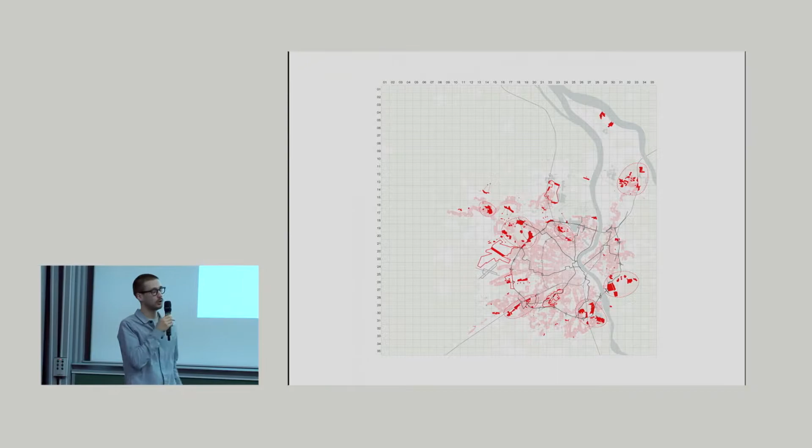Historically, 51N4E has been an office doing all kinds of projects, from very large-scale studies, such as this one in Bordeaux with 5,000 logements, to also very visionary projects we started out of our own initiative, thinking about how buildings could take up a function in reactivating cities. This is one in Brussels, where we developed a tower typology where a whole bunch of functions came together, but which was just out of the blue, without any brief.

We have also been doing large public buildings, really built architecture. This is an example in the city of Genk in Belgium, where we developed a cultural institution. And then very small-scale interventions, where we go up until the level of furniture, and develop furniture to see how it actually forces people to behave differently.

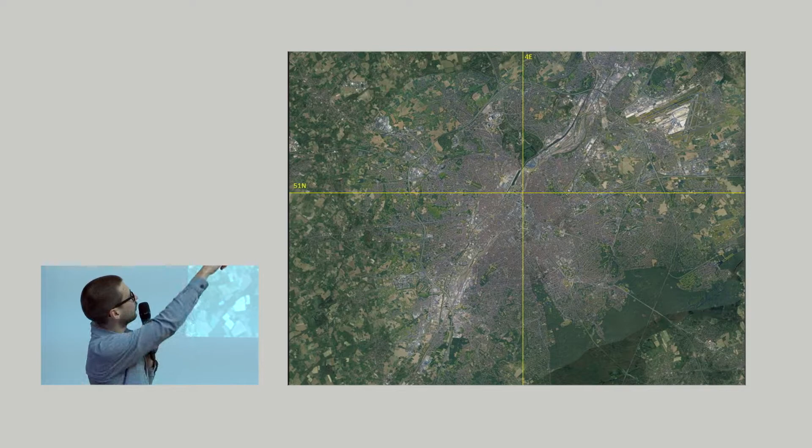So let's start with Brussels. This is Brussels - we are located in the north of Brussels. So you have the Pentagon, and then in the north there is a quite undefined area where a lot of things are happening today. You can see it here a bit. We are actually located in the train station, next to the railroad tracks. On the left of it you see the North District, which is a large office district built in the 60s, 70s, which I will talk about soon.

And then some industrial site - I will try to point it out. Yes, this industrial site, which is now also being reconverted. And we are actually located in this kind of area where a lot of things are taking new shapes and undergoing change at this point.

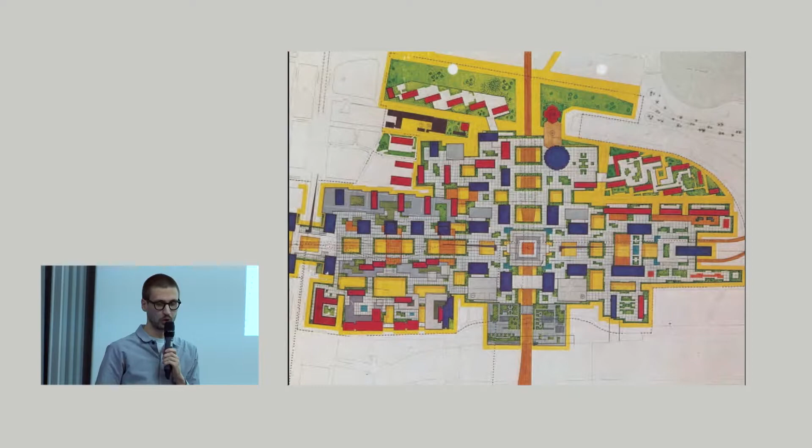So to explain this, I think we need to start in the 60s. This is a master plan that was developed for the district where we are in. So here in the bottom, you see the North Station. This is actually WTC 1 and WTC 2, the two towers about which we will talk.

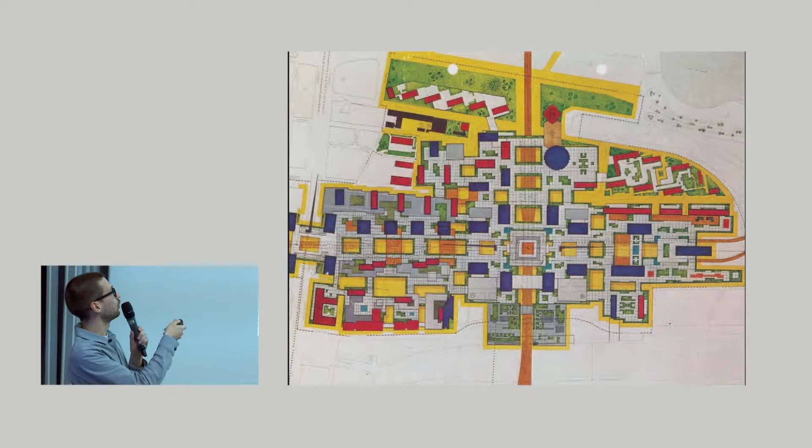And then you see a whole array of towers, most of which were never built, in blue office towers, in red residential towers, which were very clearly separated from each other, or there was a kind of strategy to build the office towers along the axes. So this axis which leads here into the city center, and this axis which leads up to the canal, which you just saw earlier.

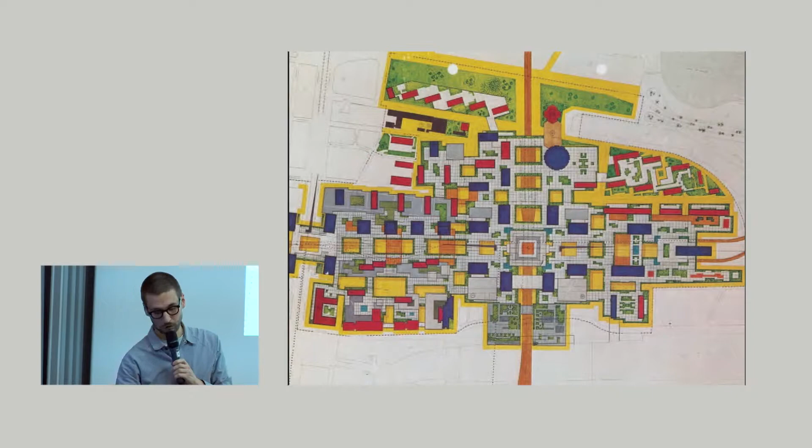The housing was actually placed in second line, and were actually replacements for previous, or existing fabric, which was working class houses, very small grained. So the idea was that these houses would be demolished, which also partially happened, to be replaced by these big infrastructures, big living blocks.

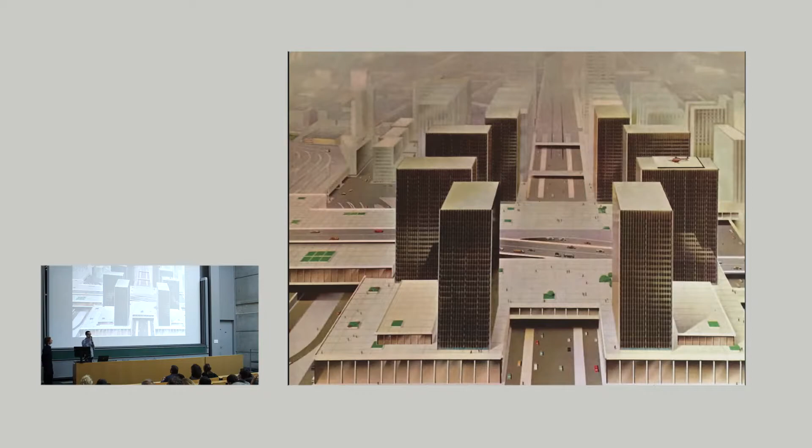And so these highways, which were, of course, infrastructure impossible to make at this point because we're in the middle of a city, are running exactly through the crossroads of the eight towers that were meant to be built around it.

This is a perspective of the two towers which we will be talking about. And here you see that the idea was to split the level on which the cars would go and the level on which the pedestrians would walk.

So there was a clear strategy to separate users from each other and not try to find a way to make them work together. This idea of trying to give space to everyone, but by separating them, is here made very clearly in architecture, and again is a kind of projection which takes a whole lot of effort to realize in an existing city, and which of course fell short quite soon when they started realizing it.

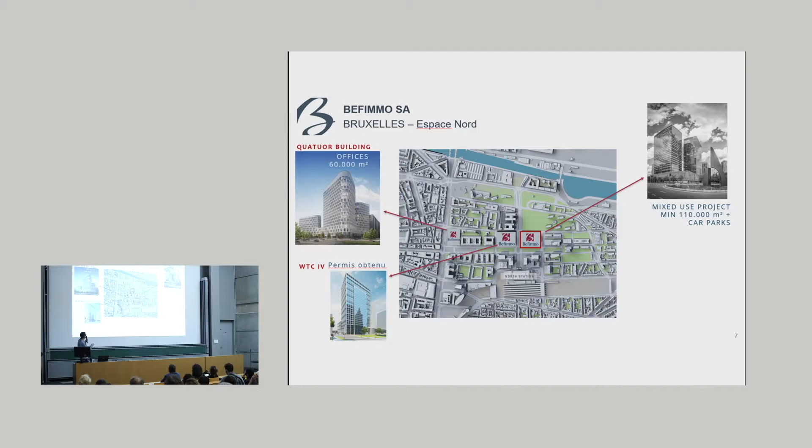So again, you see the North Station here, and so it was about these two towers, the two World Trade Center towers here, but he also owns the site on the other side of the street, and he also owns this building. So you start at that point understanding that the interest of this client lies beyond this project, and is also an interest in what do we want to do with this district.

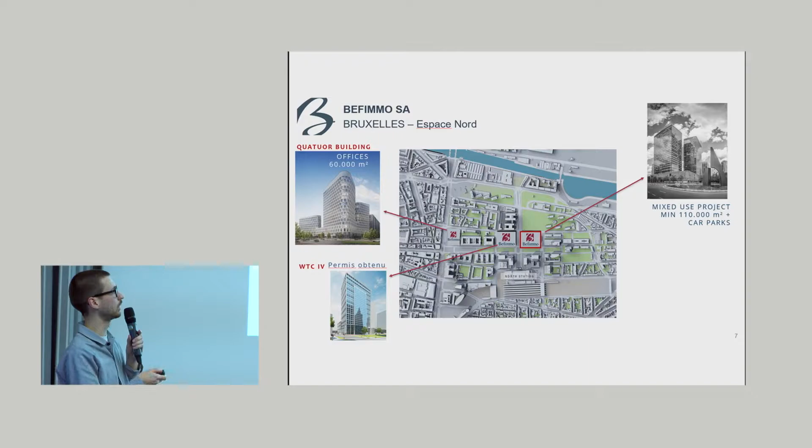And so that's the nice thing, of course, that as an architect you can also think beyond the plot and think how can we make something from this development, and how can it affect the space around it, and how could it actually lead to maybe different or other projects in the future.

What is maybe most surprising is that for such a huge building, because it's about 105,000 square meters above ground, with 5 floors underneath the towers of another 50,000 square meters, is that the brief was quite short. And so you see here the summary of it.

Which was basically what we got. And so you could say that this is quite confusing, but the quality of it is, of course, that you're very free to do with it what you want.

So you see that there was an ambition to turn the monofunctional tower of offices also into housing, into hotel, and also to bring in things that would actually start having a public use, such as retail or bars or restaurants. So this was a starting point, but also this, which was a project made by the architect that was already assigned by the investor to make the project happen.

And so the call was actually not for one architect to work together with the investor, but actually as a co-architect, a design architect, to come into the consortium together with the architect who was already on board and actually doing a lot of projects in this district historically seen.

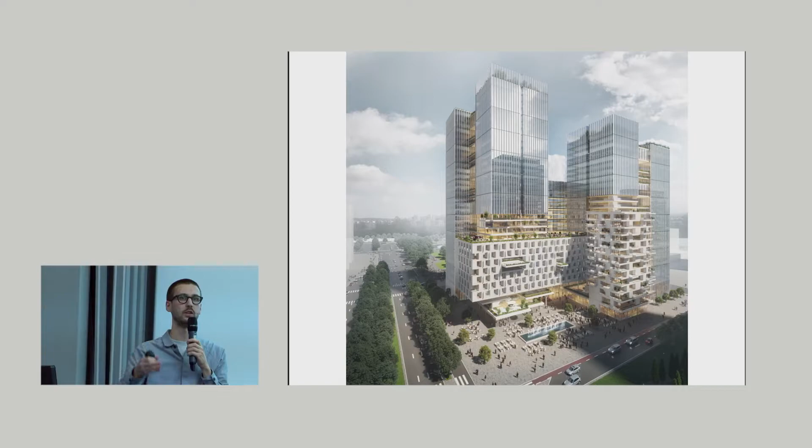So a lot of the buildings that you just saw in the images passing around, this architect, which is Jaspers-Eyers, has been doing for the past decades. And so this was an architect who was very well known with the area and had also a very established way of developing office buildings, but also, as you see here, office buildings mixed with housing, with hotel.

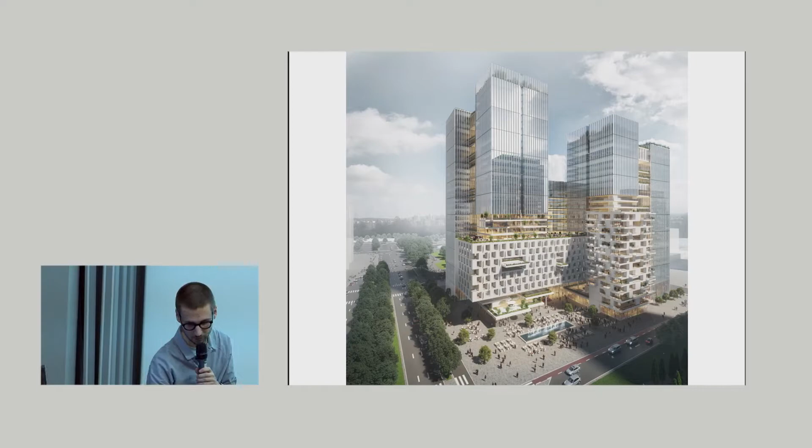And so this was the projet directeur to which we were asked to answer to. This was the architecture. And next to that there was a study by the engineering firm Greisch, which is in Belgium, a structural engineer, of how we could actually reuse the towers.

And so there was a whole study made of, could it be that we conserve everything? Should we just replace the floor slabs around the cores that are inside the two towers? Or should we just demolish and reconstruct? And there the question was, do you do it with or without the internal circulation cores.

So a whole study was actually already done before we came on board, and which showed that actually keeping the towers with their floor slabs around it was not possible. There were issues with the carrying of the plates, but also issues with the free height that was possible, and which you have to somehow comply with for a standard office market.

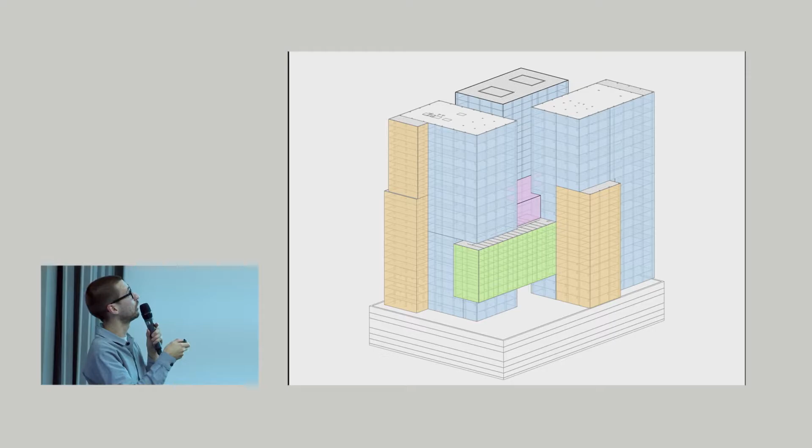And so what they did here was how to bring in more quality was to, instead of keeping all the floors, they reconstructed a floor where there would be one today, and then skipping 1.5 level to go to this floor, which is a new floor and which doesn't attach to a floor slab today, and then again a floor slab which was already there today.

So they were actually multiplying the floor height, which was in the towers today, 3 meters 22, but actually very limited, to 1.5 times this to bring in quality, to actually compensate for the loss in surfaces that you get with this. They propose a third tower behind the two existing ones, but which of course had problems in terms of daylight and quality.

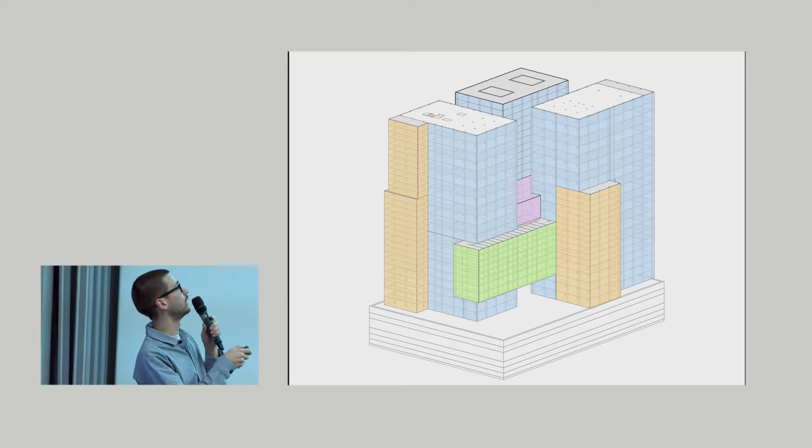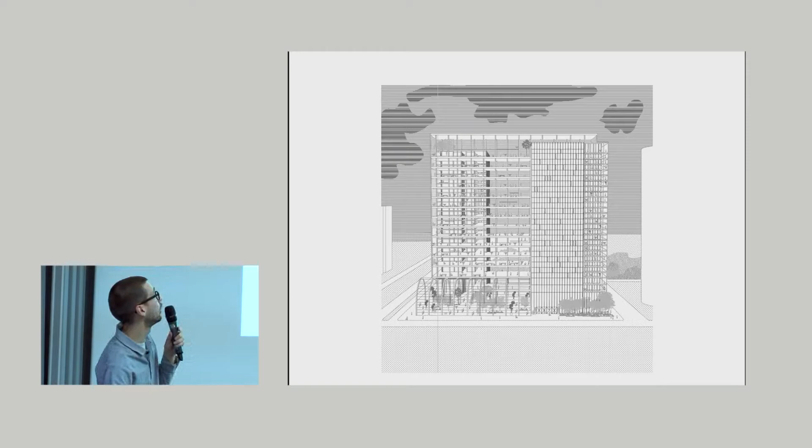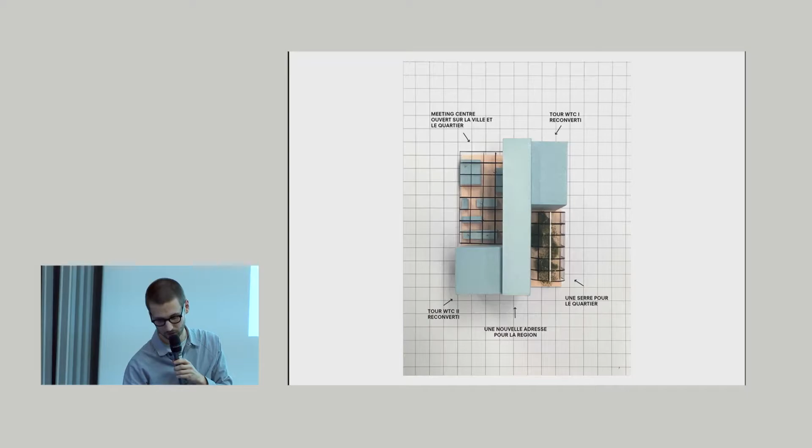This is the first image of this concept, where you see the two towers being linked with a new volume. What we also did was program the two corners, which today are closed plinths, addressing them to the neighborhood. On one side you have the greenhouse, or serre, which addresses the North Station and the business district. On the other side there would be a meeting center, addressed more to the living neighborhood and the canal.

And this was a second important thing—completely opening up this closed plinth, because it never got a real use. The idea of having pedestrians and cars split in levels never came about, so this closed plinth was always a hindrance to making interactions with the city.

Here we clearly turned that around and made direct connections to the street with the greenhouse, the shops, the entrance of the housing, the meeting center, the hotel lobby—so the streets are actually activated, where today they are very desolate.

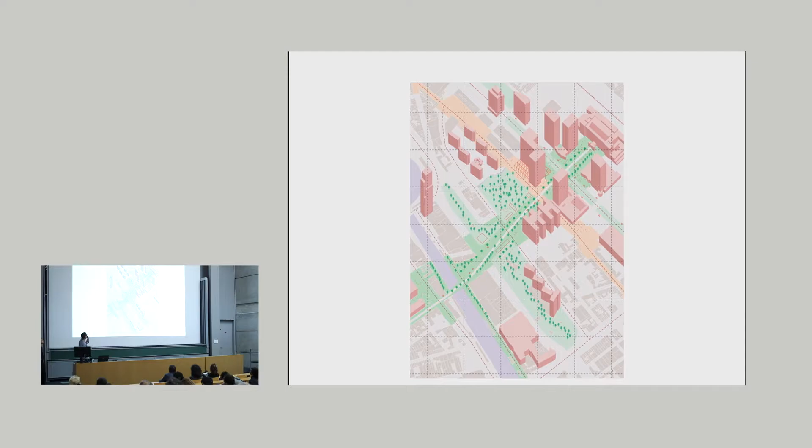Here you see the integration of this strategy into a drawing showing the development of the neighborhood, where there's a shift happening from this axis, which is around all the office buildings built according to the master plan, to a new axis being created today between the North Station and the industrial zone, which is also being reconverted into a cultural place, with housing and offices happening here too. This new axis links a lot more realities in this district than the old one, which was very focused on the office environment.

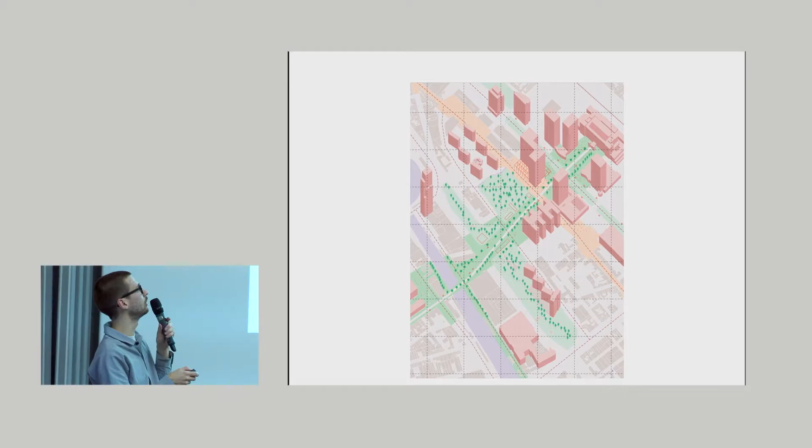This axis will gain in importance also with the Kanal Centre Pompidou, developed right next to the canal. It's this axis which we activated with the greenhouse and the main entrance of the new offices, the shops—this would be the new main facade for the biggest program, the offices in the building. Next to more locally oriented functions like the meeting center, but also sports, a co-working place, a supermarket, which reinforced this local street, a street that dated back before the demolition of the neighborhood took place.

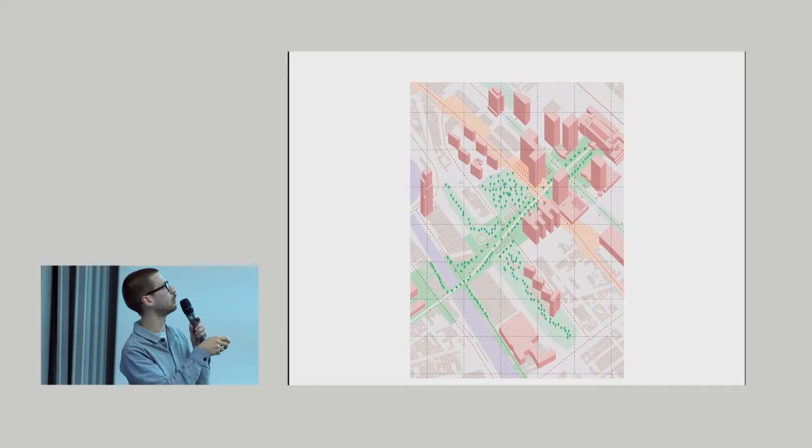Today there was a big gap between this housing area and that one, because of the two towers in between with a closed plinth. So we kind of restored that fabric by putting this building, and also the entrance of the housing, on that spot. A last thing we proposed as a first idea for the investor to react to was a planning, and a very intense one, because the investor had a plan to propose the building to a future user for the offices, which was a very important goal for him to reactivate his building.

Giving structure to this process meant different process lines interacting with different people. There were conceptual talks, programmatic talks, technical talks, talks with the city, and talks with stakeholders of the neighborhood, all running parallel to each other, which was immensely important to be able, in a short amount of time, to develop together a concept that would implement this complexity.

With this proposal, we won the tender. We got to know that they said, we don't want this projet directeur from the other architects you just saw earlier, we want your project. We think it's the best way to reconvert these two towers. And that's the moment when it started.

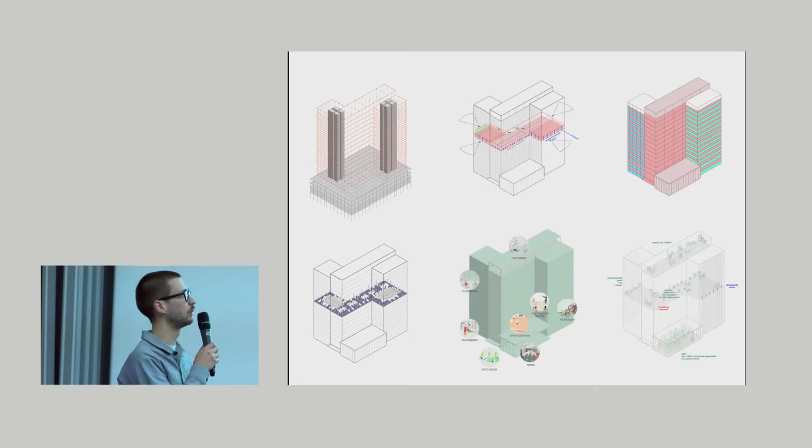So you see that actually the environment we were in was actually part of the process of doing this project, and getting the understanding of what the multiplicity of interests was in developing this thing. And so after winning the competition and being confronted with this huge building for us, which is not something we do day to day, and we are not at all prepared for the scale of building.

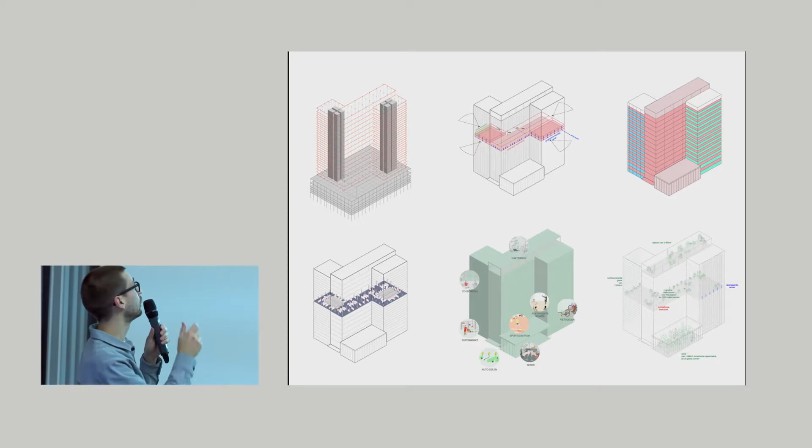At that point we started designing it, to actually design it in a way that it is answering to the different aspects of what this building could become, and how it needs to be prepared to become something that is open and not programmed for one use, but able to shift its identity or function during its life. We looked at it in a holistic way, which you could also call a circular way nowadays, which talks about a lot of different dimensions. I'll go a bit quicker now to talk you through these dimensions.

After winning, we also decided to investigate if we could keep the existing floor slabs, knowing that it would be quite dramatic to tear them down. You could say we're keeping the cores and the underground of the existing towers, but in spatial volume this is only a part, although in weight it accounts for a lot.

We started making technical drawings, comparing the new volume which we built in between, which has a double height, with the existing towers which have a regular height, and seeing how they would work, how we could solve it technically, and how these things would meet each other.

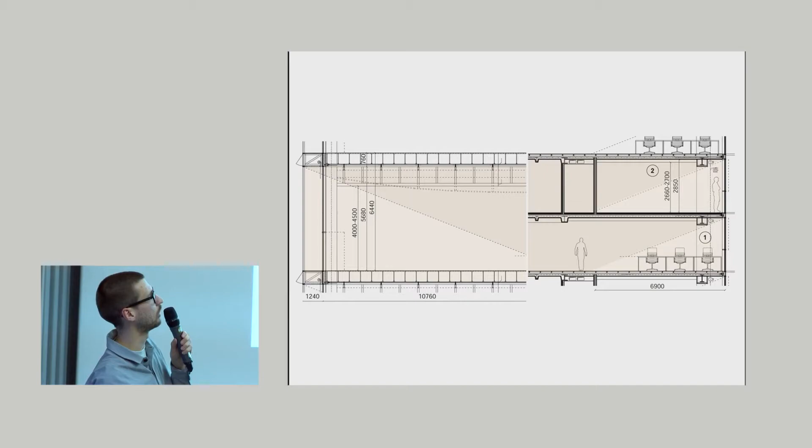We started imagining opening up windows in a tower which up until then had only closed windows, and you couldn't bring in fresh air. This is one of the main qualities we thought would need to be there in order to have both housing, offices and other uses.

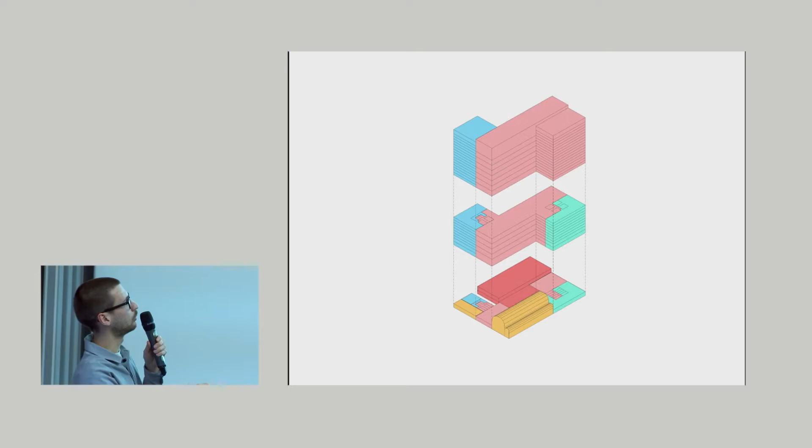We started netting the program into the building, and you see here a scheme where you see the different programs. In blue, the housing. In orange and pink, the offices. And in green, the hotel. They're actually next to each other.

While researching, we discovered that it would actually be more interesting to think of this connecting device that we installed in between the towers as a platform which continues into the existing floors around the cores, therefore making very big surfaces which are enormously flexible and reduce the building in height per function, because in the in-between floors you could program the housing.

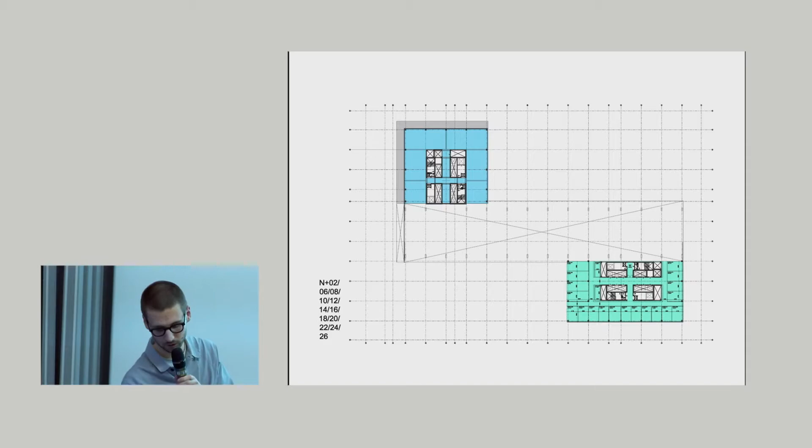Here you see a very sketchy way of drawing the apartments, and hotel rooms in the other one. It would actually deliver this building, if you look at it from a surface table, where you have very large floors on every uneven level, where the double height volume that we put in the middle connects to the towers, with housing and hotel on the even floors in between.

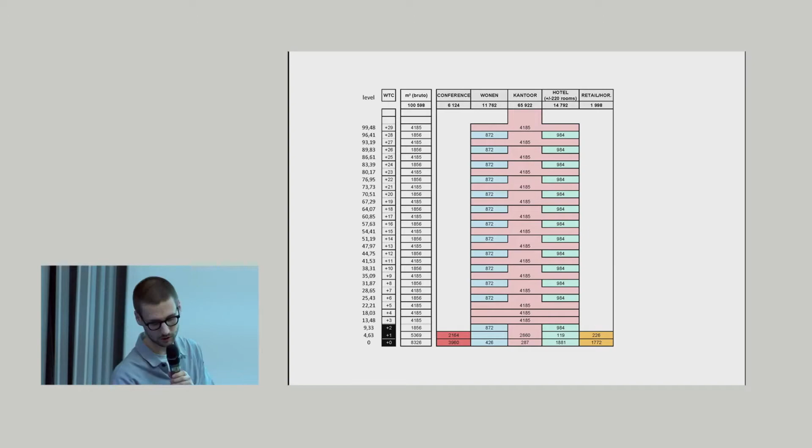And it would deliver this scheme, which is quite unusual, and which we also discovered along the way - it was not a design intention or anything. It was just responding to the qualities that we discovered as architects ourselves while investigating the program, but also the way this building worked with this new volume in between.

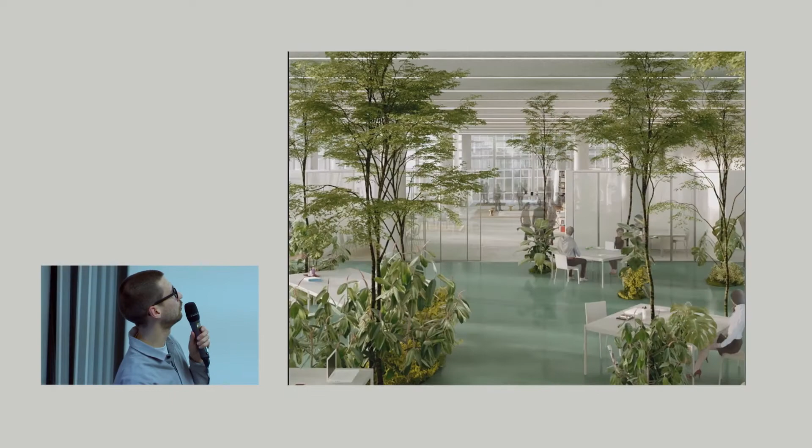And so we started understanding the space, started imagining it. This is kind of an interactive working environment that you see taking place in this new volume. But there could also be kind of a forest because of the height of the floors, which is 5 meters 30 free height that you have here, which is huge. All kinds of things could actually take place - this is a library.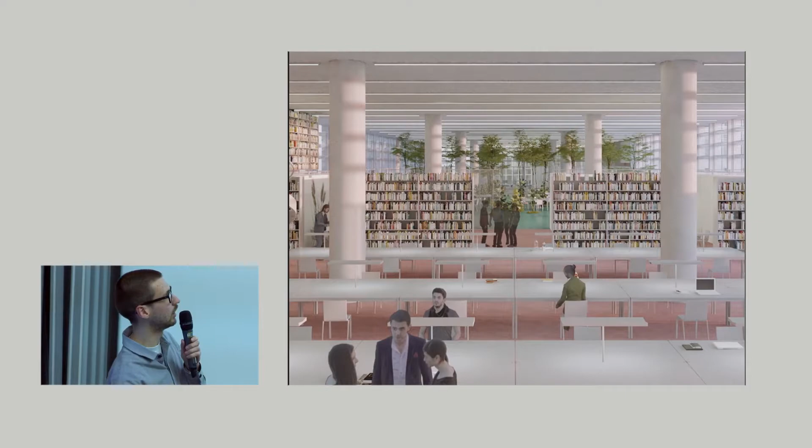And so this freedom in arrangement of this building was also the freedom that was necessary to actually convince the future user, the future office user of this building, to come to this building.

Yes, here we are. And so drawing office plans for this tower was actually very interesting, because you don't have the boundaries of a typical building where you have just one layer of space to actually make closed or open spaces where you can work. But in this double height volume, you have much more flexibility into how to arrange this plan.

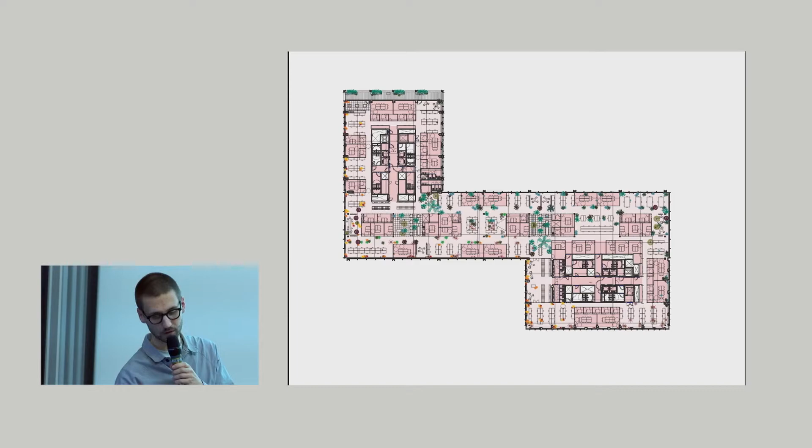So here you see the plan, which is much more free and allows a lot of possibilities. So this changeability is there, both in the office plan as well as throughout the building in its program. So also the programs could change relative to each other.

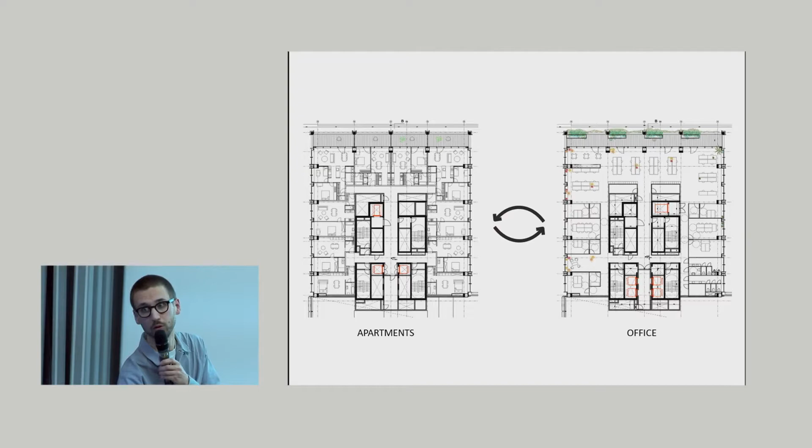This investigation was also very much a technical one, on how this building could actually be converted in time, where today you install a housing program and tomorrow there could be an office program. The changes that come with it are actually all linked to circulation, how you enter the building, and are not so much structural. So this kind of installation of principles which allow for this change are very important to make a building that is future-proof.

But this is actually not noticeable on first sight, because the strategy chosen to develop the architecture with is one that is non-program related. So the towers that are left over, because we cut them short by introducing the new volume, are developed in one language, not linked to the program behind, because this can change over time. And then the new volume in between is clearly of a different type, with a different facade and a different expression.

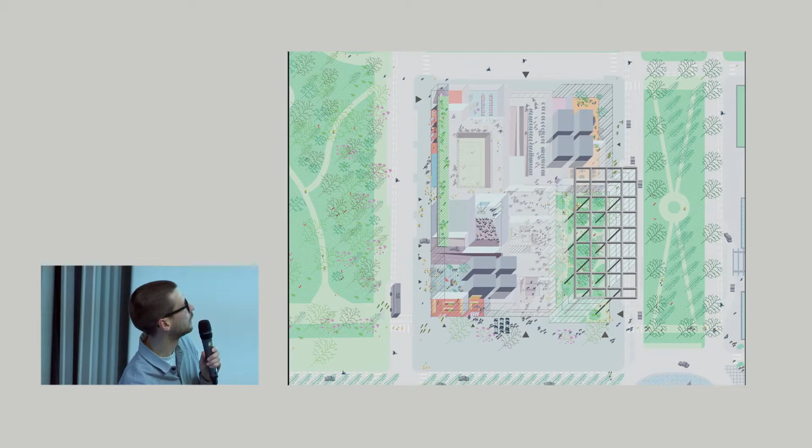So this is then a plan of the ground floor. These spaces that we developed on the ground floor were developed to also be able to interact with activities happening on the public space.

The greenery strategy, which we developed also as a test case in our office, installed into the building, and also on the roof terrace.

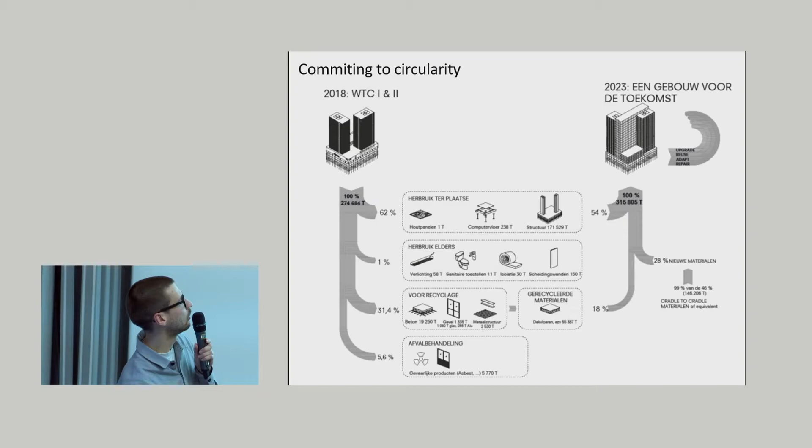I will quickly go through this one, which is talking about the way the old building is, on a material basis, reused in the new project or elsewhere. While the building was already empty, so we had to leave it at a certain point in time, all the materials were excavated and brought down, and from there actually distributed either to recycling plants or to the producers of the material itself.

So even though these materials were made 50 years ago, some of the producers took them back and recycled them, and some also went to other projects in Brussels where they made new walls out of these materials. Floor tiles on the roof, which we will reuse in the project itself, are stocked today on the site near the canal, and part of them are already cleaned and look like new.

We also tried to reuse things like these covers of the radiators. We made tests of it, we made drawings of it, we made a mock-up, and we actually showed that this reuse is possible. But in the end, not feasible economically, and also not feasible in terms of risk, because these elements are also 50 years old, so they have slight dilatations and are not so straight. To apply them in a technical way in a new building was not feasible, so the solution in the end was to use them in different applications.

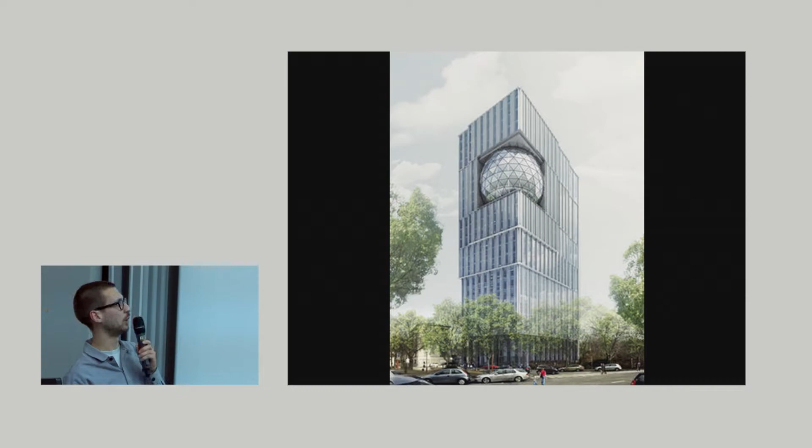I will quickly jump to the next project to still leave time for Wim to talk about the other two projects. This is another tower we are doing in Brussels, the older IBM tower, and it's actually a very famous building because the ring road in Brussels passes next to it. Due to its architecture, which is quite remarkable and linked to the identity of IBM in the 70s, it's really a landmark, and so there were plans on the table to reconvert it into something like this.

Who asked us to think about how to tackle this building and what he should do with it. So we went on site, and we discovered that the building as it was had a lot of qualities. You have these windows which frame the city very beautifully. Each window is almost a panorama.

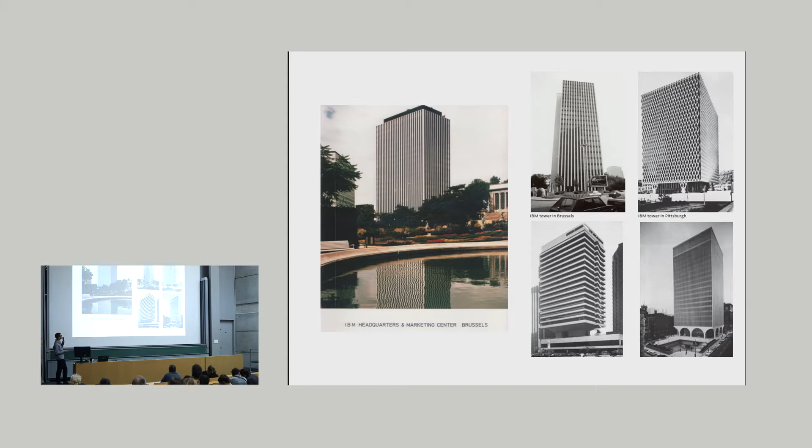So we decided that this architecture is actually so valuable and is for us kind of heritage, both to the city of Brussels and, in a larger story, as modernist heritage, as you see here with the other buildings IBM made throughout the world. We decided to keep it, and so this is the new project we proposed, where we did just a few adaptations.

On the ground floor, we opened up the building. We made a piano nobile, which actually relates the building to the new square in front. And we topped it up by creating a roof terrace. For the rest, we didn't do anything on the design of this facade.

Also interior-wise, the building was very generous. It was all open floors. The only adaptation we needed to do was adapt the facade to create more height here and more generosity in floor height, because there was an old technical gutter for the heating and the ventilation installed there.

This is then the new design with the potential new functions behind it, organized like this. So the new building, instead of being a monofunctional office tower, would become a co-working space, then some offices, and then a hotel above it.

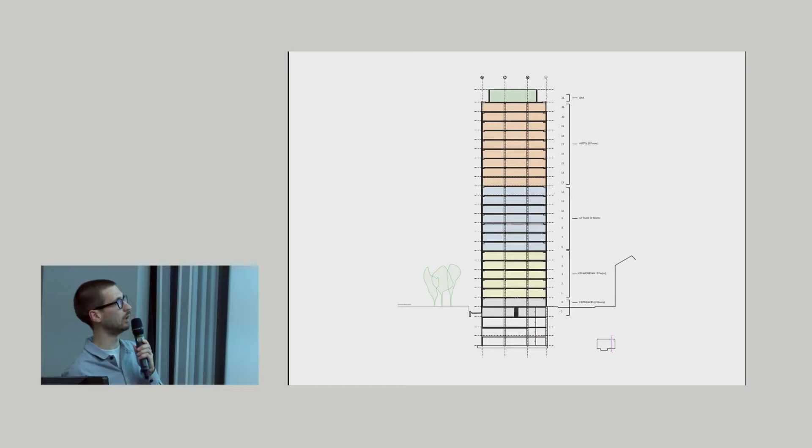And so the building again is being adapted and given diversity. Also on the ground floor, this diversity is addressed to the street, so that this square, which before was not a square but actually an empty dead zone, would be activated and would become part of the city again.

So we worked with the design that the landscape designer already had made for this part of the street, going from a tunnel leading to the North Station and going to the city center. We reacted to it by mimicking the design in the entrance hall, raising together with these steps, also in the interior, with steps towards the level of the elevator lobby. And so bringing in the square.

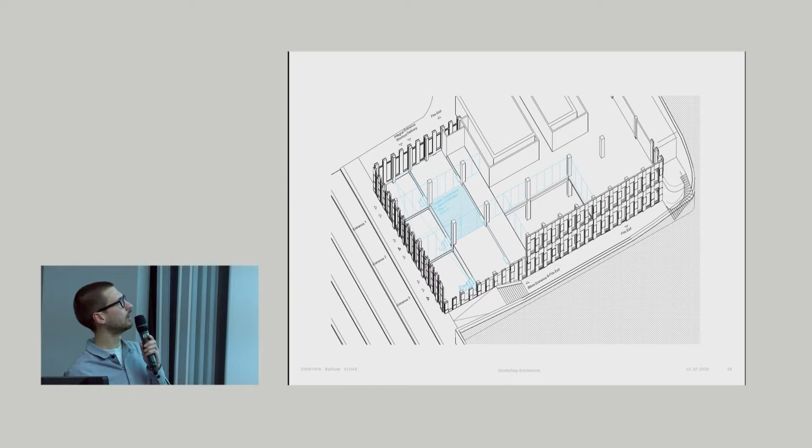And also actually facilitating the different entrances for the three new users that could come into this building. We also designed the relation to the park, and this is actually the result that is being built at the moment. So just a few pictures.

Hello, everyone. I think we move a little bit more to the north. We go to Antwerp, and then we go back to Paris. We come nearer with the next two projects.

First in Antwerp, we did a very small project in the city center, near the former harbor, which is now becoming a residential and cultural area. We acquired a new small project a few years ago.

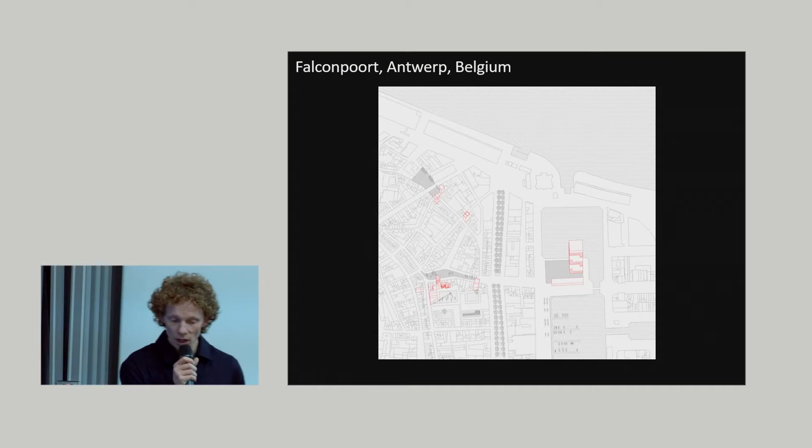This came from an architectural competition where our new client, AG Vespa, an independent communal developer, has the vision and ambition to develop and transform the city in punctual ways. So they transform corner buildings into dwellings, and in that sense try to impact the development of the city.

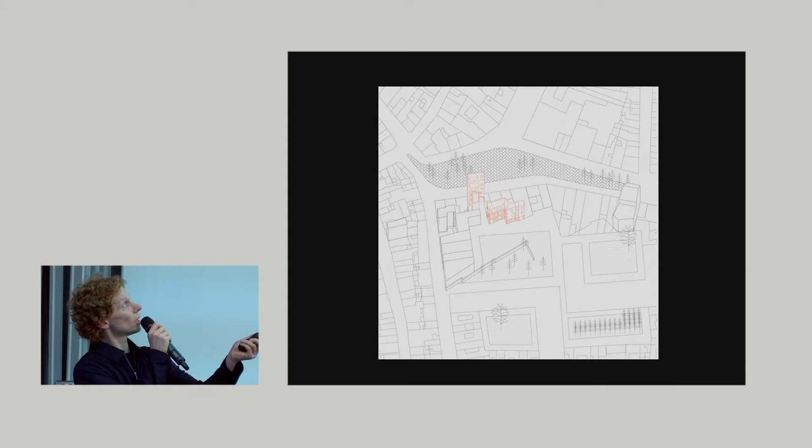Our project is actually spun in between a larger public space on top and an inner courtyard which is surrounded by residential blocks. The project has two areas, let's say, or two building blocks: the gate building and the courtyard building.

The historical context is quite stirring in a sense that the plot and the project was part of a monastery, and the gate, a Baroque gate dating from the 17th century, had to be integrated since it's a protected element in the project.

But you also see that through time, this monastery was adapted and transformed, and that the proportion, the size, and the position of the windows was not like before, and this needed to be restored to the original composition.

On the inside, on the courtyard, you see older houses which were really in a bad state, houses where the nuns were before. This is the small alley coming from the public square into the courtyard, which is pretty closed off. It's quite problematic, also knowing the context of the red light district in the nearby neighborhood, and also the problems created by closed off walls, garages that are closed, and blind walls.

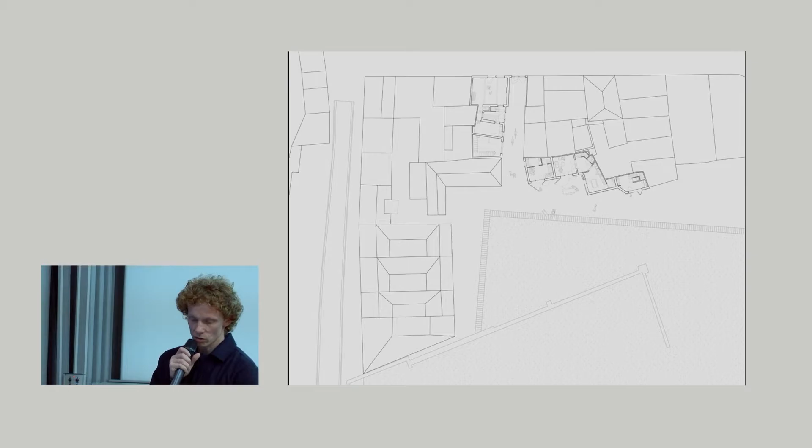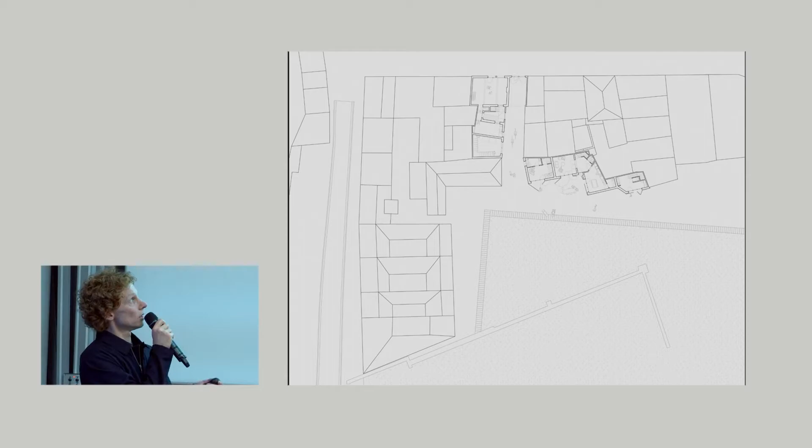And so we introduced the proposal with 6 dwellings and a shop on the ground floor, where here specifically there was a tension between public and private space. The city of Antwerp wanted to preserve the connection between the public area, the public space, and the nearing streets with this passage, so it allocated it as public space, just right up until the plot border.

You have a really strict line between private and public. And the question here rises: how can we make, on these small areas, 6 dwellings and still have a house which is part of the city, a house which is private, and a house which people can also enjoy, and how they can appropriate the public space.

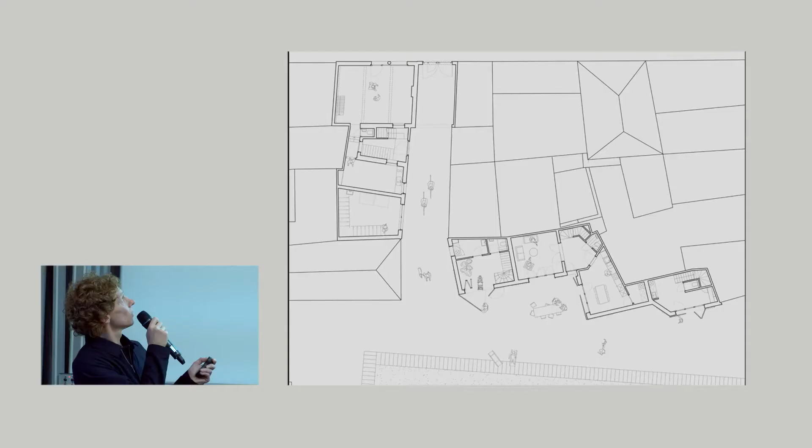Six units and a shop is the program. The shop was integrated in the gatehouse, and all the elements that were not original were demolished. We introduced an open staircase here between the existing original gatehouse and a new volume we created, where the open staircase became a shared space in which people could relate to one another.

And the other three units were organized in a 3-story high volume, which was laid out at the back of the courtyard.

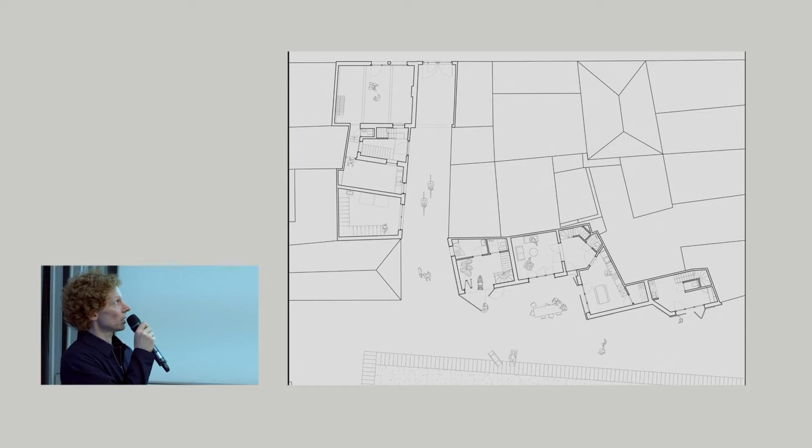This open staircase somehow also activates the public domain and allows for better relations from the private units to the public space. You come outside of your apartment and you are immediately invited by the perspective towards the courtyard.

I'm taking you up into the open staircase. It's quite a difference of scale, I think, but it shows how we work, which I will also explain a little bit later. Here it's about size, about how to relate and not to relate, how to allow a view and not, how to create open relations, and also how to mitigate and control privacy.

We start from the bottom, where you actually see the height of the wall is just enough not to have a full open perspective on what's happening behind.

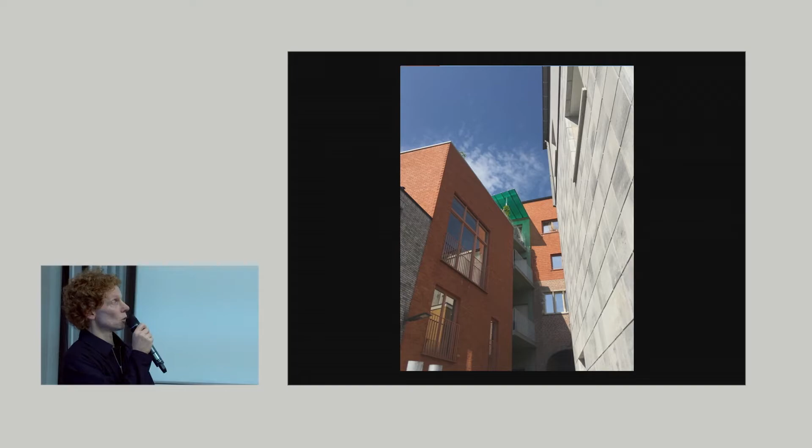Going up, you somehow have a surprising moment where you can clearly read the difference between what was original and what is new, and where the inhabitants and residents are invited to go up, and where this closed-off alley becomes a more porous, more open environment where light is coming in, where more relations between inside and outside are created.

For us, this situation was actually not thought of during the design, but arriving on site, we were kind of surprised that by creating this staircase, you also have relations which you don't foresee. This is looking into the terrace of the neighbors, and you somehow feel related, but there is still enough distance to preserve privacy.

And this is what we take along in other projects: when we do densifications, we try to integrate relations and qualities in order to make those spaces and keep those spaces attractive.

Going up, we are protected by a canopy that gives comfort, going from your own private apartment to the shared terrace. A shared terrace which was needed because on the small plot we didn't have opportunities to provide terraces on each of the private apartments. And of course, this gives nice views to the outside.

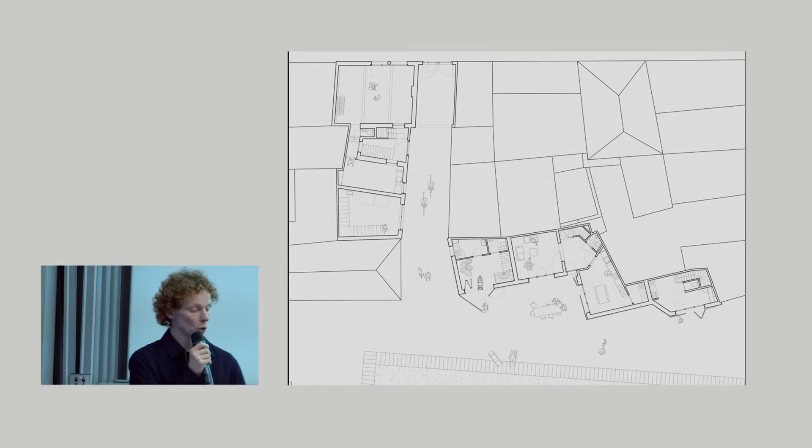And the challenge is to think of how can we make this a quality. How can we make those small footprints into a qualitative environment to live in, knowing that the plot actually is private and public in a very hard line. What do we need to provide as a transition, and how can we make a public space that is appropriate, that can be appropriated by the residents?

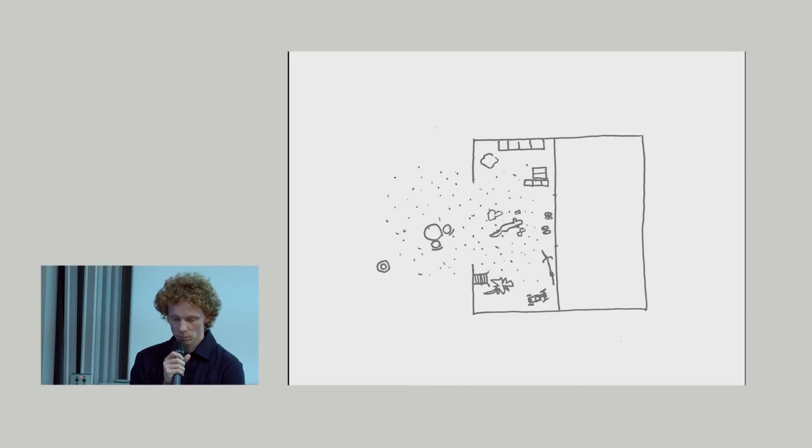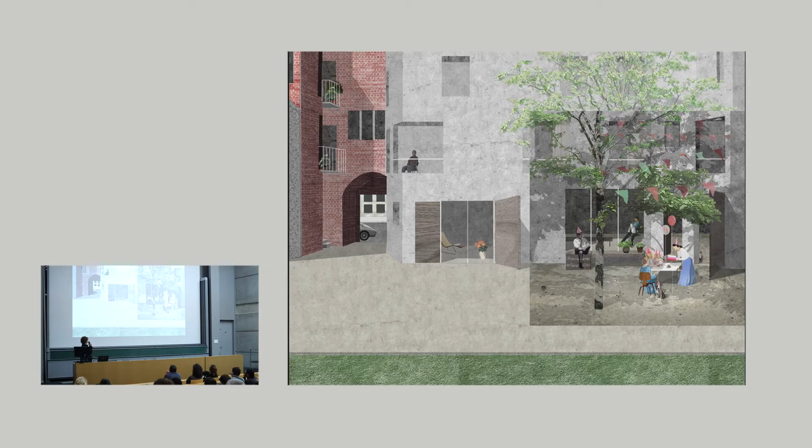We provided a solution where we provided more space than you would expect in the entrances, where future change is allowed, where residents can choose what they do with their extended entrance hall, with some amenities like a toilet—when you have a birthday party, you don't have to go upstairs—and storage for your outside furniture. Together with this space, we also created larger openings and the possibility to close them off, to choose whether you're enclosed or open to the public space, and allowing also to use the public space. This is an image of these larger entrances, where during COVID we noticed that people use it as their teleworking spot.

Zooming out a bit, it gives a view from the courtyard, where we neatly designed the facade in relation to the old monastery courtyard that was there. So we mimicked the cornice, and we integrated a new square pattern of tiles, which somehow echo the back of the new environment of the terraces. And we're very happy that the residents now use this public space and have appropriated it.

Moving a little bit more south, we go to Paris, where we are doing at the moment a project called Robin Oratoire. We acquired this project through an offer bid, together with our clients Altarea, Cogedim, CDC Habitat, and Histoire Patrimoine. This image actually, for us, is a kind of key image, because it shows that in this historic environment, a sense of care and solidarity, which has been there forever, is still possible in the cities.

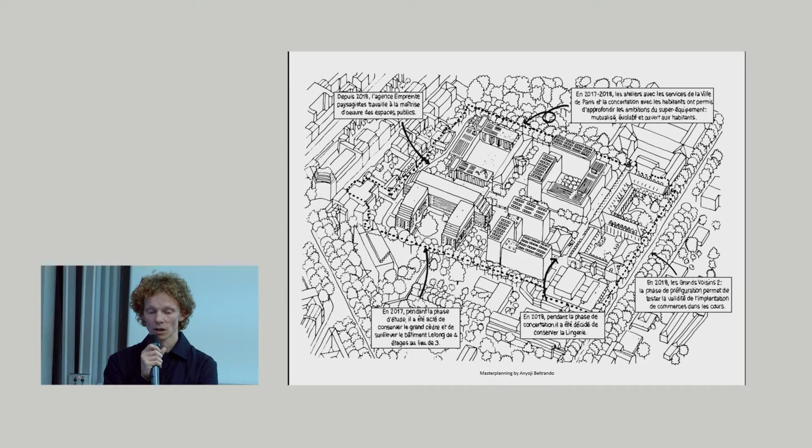The project is part of a master plan managed and developed by Beltrando, bringing together qualities of accessibility, permeability, reuse of 60% of the buildings, and a mixed-use activation to envision this space more as a process than as a final plan. Our project is more related to the avenue.

More related to the avenue, where it is actually renovating the Robin Oratoire buildings and integrating a new entrance building, the Villa d'Enfer, which is designed by Tham & Videgård.

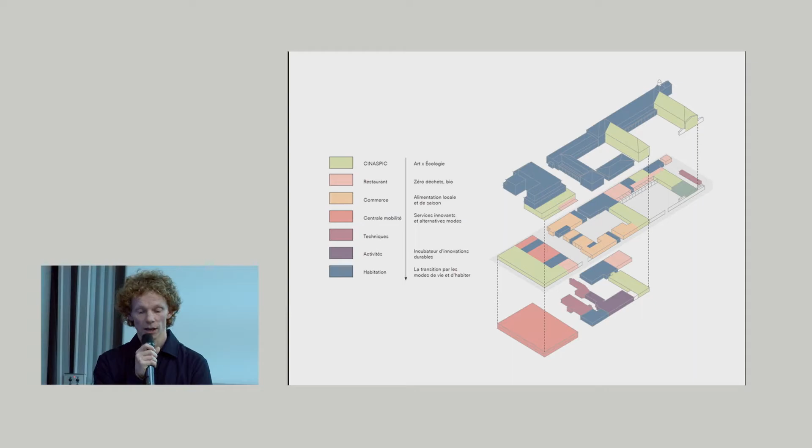This is somehow giving an overview of the scope of the project, where within the envelope of the heritage, we introduced a multifunctional scheme that weaves the uses and spreads them throughout the ground floor, but also on the upper floors, with restaurants and co-working spaces, and where there is also an integration on the upper floors of a mix of different types of social and affordable houses and apartments.

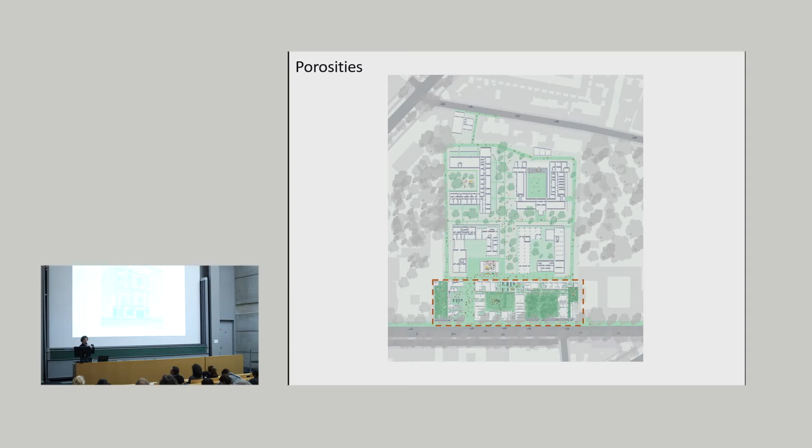There you feel really the tension in between what is public and what is private. And what we learned from projects like Falcon Port is how to make a transition in between the public life and the private life, not only on the scale of the resident, but also on the scale of the city.

It is important that inner areas of blocks are being developed as part of the city. And in that sense, the project somehow is a mediator, or is a filter, an interface in between the public life on the street and the inside of the building block. And therefore we make those urban reality drawings to envision how people can actually occupy the space, how people can appropriate it, and how they can pass through.

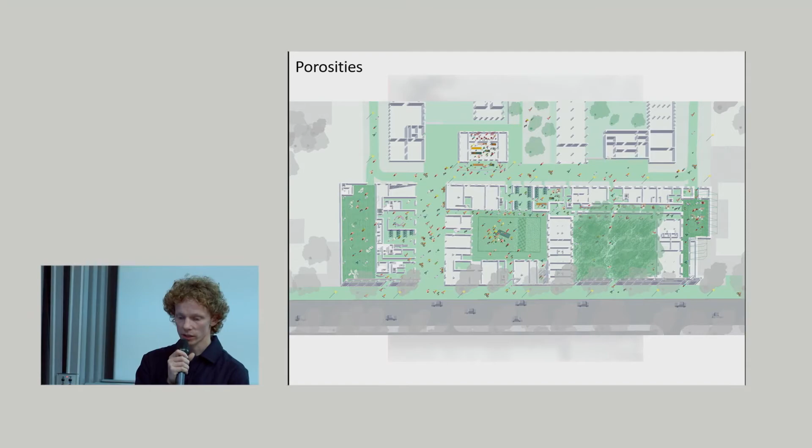And in doing this drawing, we scanned the context and the existing buildings to find a possible structuring way that would make the place both more welcoming and more legible.

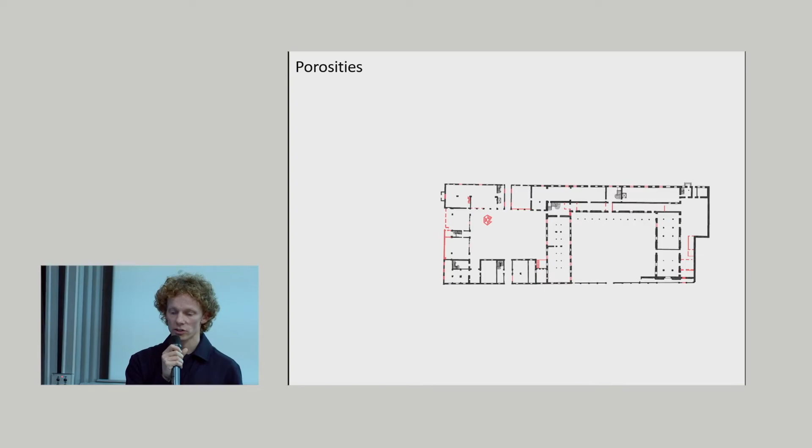But paradoxically, the Robin Oratoire building is an ensemble that is very heavy and rather closed. It's a protected building also, and so therefore we introduced an attitude in this demolition plan, which is actually just showing how we de-stone the site in a very subtle way with punctual interventions, and this creates a refined porosity in which uses are brought together.

And then you see through larger and smaller entrances that trajectories of people walking and using the space, people consuming, people activating the space, together with a subtle way of dealing with heritage, green space, and built space, provide a welcoming environment.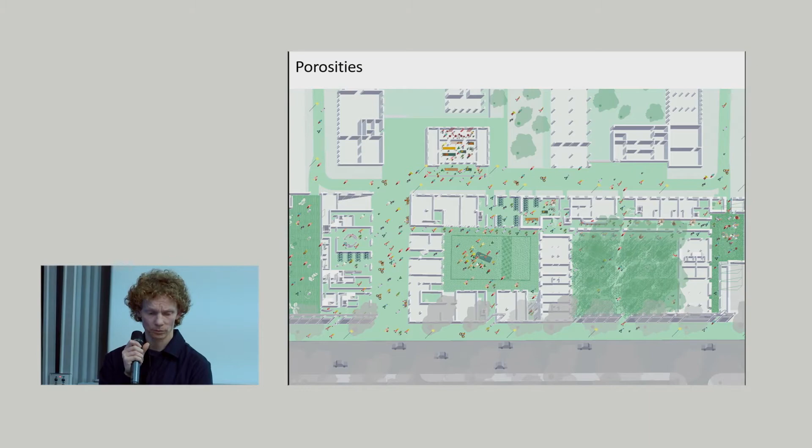To affirm this urban porosity, we have developed a system of 5 transitional spaces with distinct environments due to their pre-existence and identities, but also complementarity in use that they propose.

These spaces are linked by a new circulation on the ground floor. It's kind of a walkway that connects them, which takes part of the larger network of alleys and of the network of how to get into the deeper area of Robin Oratoire.

So actually it's also organized around the 2 existing courtyards, so Robin and Oratoire. We created and introduced a new passageway, which is the main entrance to the Saint-Vincent-de-Paul area, and an agora, which is a covered space, a cultural covered space, and as well on the other side, the cour cachée. The agora is a place where art in solidarity becomes a reason to meet and exchange.

The entrance passage represents the main access, and the passage is actually animated on both sides by various programs of restaurants, entrance to housing, mobility center, where the Robin courtyard is animated around its perimeter by shops and artists' residence.

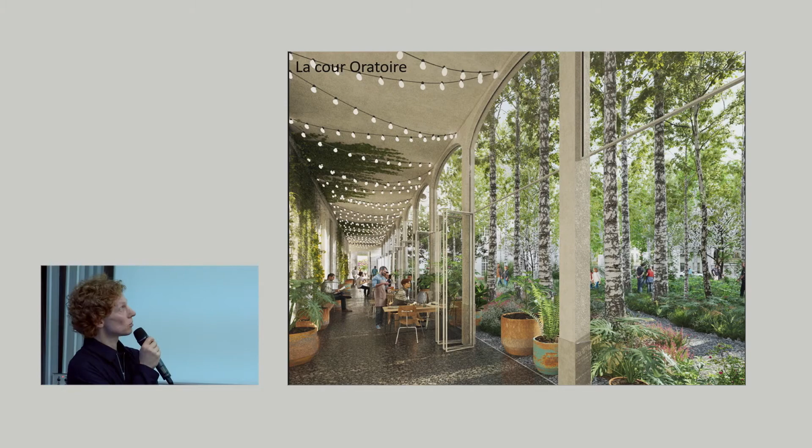The Oratoire courtyard is transformed into an urban forest with a high density of planted and potted vegetation. It's a unique experience to be there and to enjoy this new ecosystem from the terrace, from the restaurant, but also to enjoy and to walk through during the day.

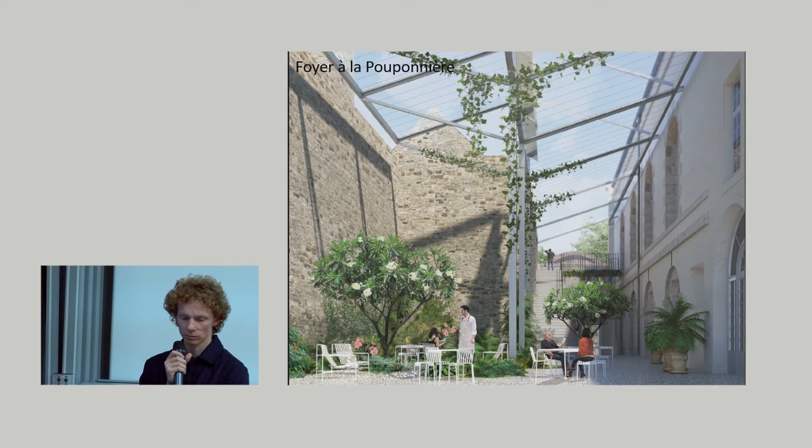And finally, the 5th place is a kind of a counterbalance to the agora. It's a hidden courtyard. It's covered but not tempered. A place which offers great flexibility of use and which serves as a foyer to the pouponnière, who is actually more on the 1st floor. And in that sense is ensuring the porosity on the urban scale.

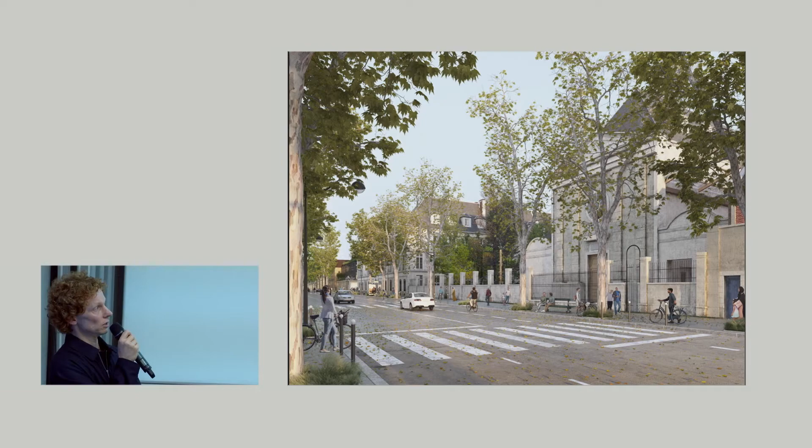From the public space, we were not able to intervene that much since it's a heritage protected building, but we used the openings which were there to make this network of this porous network, and we introduced one single new entrance here, one opening of 1.50 meters, which gives entrance to the cour cachée, a very important one, because in that sense we can actually allow for the public to...

Allow the public to just occupy this cour cachée without actually having to cross other parts of the buildings at night, when the residents will be using the cour oratoire.

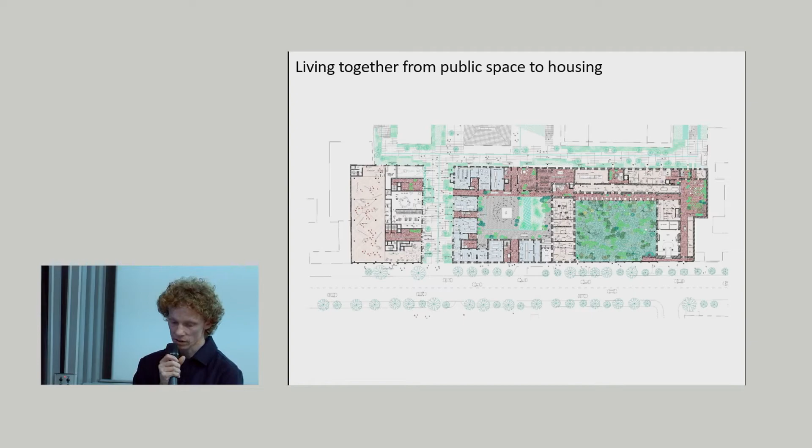The same as we did with the Falconpoort, we somehow gave more space than was needed, just to allow for change. Here, the entrances are functional for bicycles and for addressing the housing, but they're also larger, so they can be flexible and transformed into a place of leisure.

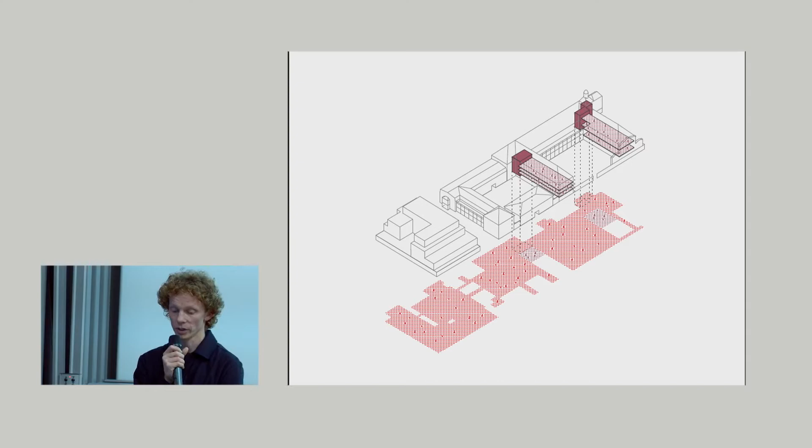Like also in this other project, vertical circulations are designed as places of collective life for the inhabitants, and they serve and save the programs of the Villa d'Enfer, such as the incubator and the two wings of the Oratoire building. In that sense, the upper floors also have a public dimension, where here you see the co-working spaces in the attic.

The Robin and Oratoire building are exceptional heritage, and in terms of that heritage and space, our work was simply to recover a clarity in the circulation that may have been lost through time, and to really be in line with the history of the building.

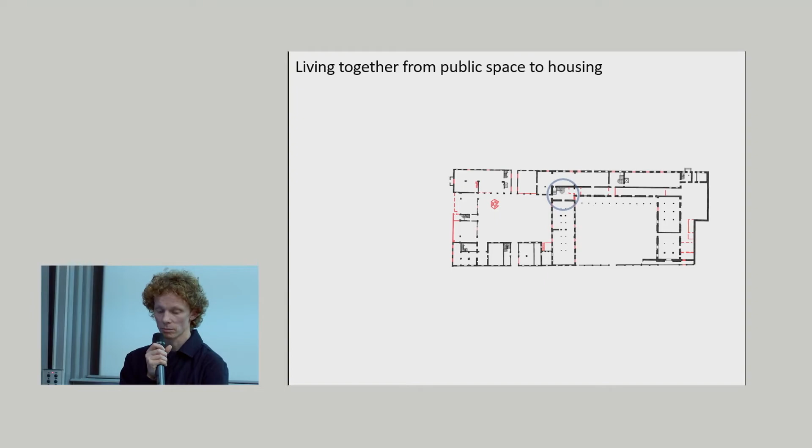For example, here in this space, in the blue circle, it's a major point of articulation between the Robin and the Oratoire courtyard, and therefore crucial in the project. By freeing up, by demolishing a storage space here, we opened up the circulation, resulting in a double perspective to the restaurant on the left and the Robin courtyard.

Linking the different meeting and circulation spaces. What is interesting here is that we used that expertise, which we developed in smaller projects, and we scaled it up, and we are quite confident that we can control this transition between the public and the private.

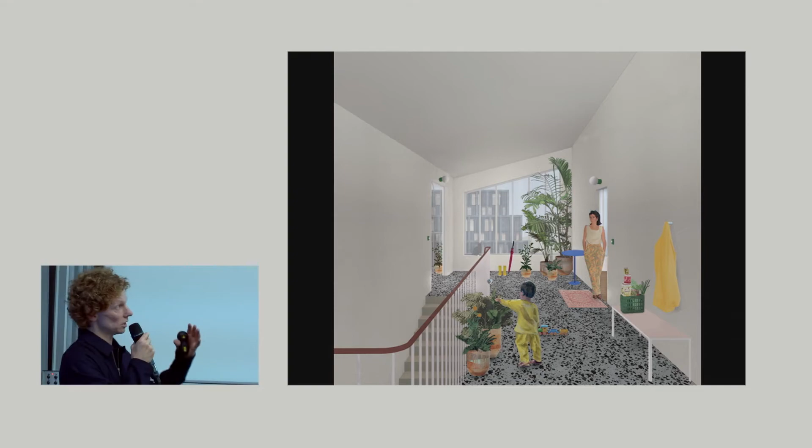These circulation spaces, which were previously intended for collective use in the former care houses, were quite oversized, and they become now very generous spaces for the scale of private houses. The landings can then be used and shared between neighbors, who can appropriate them by installing plants and use them as an extension of their dwellings.

In a sense, those two projects can be written in a drawing like this, where we focus the program of transformative densification in our office. It's actually in relation to protected heritage and existing structures that aim to integrate new qualities and at the same time densify existing urban environments.

A central question that drives us in doing those developments is: where does my home actually begin? And how do we shape our buildings so they become robust and open environments to live in? Environments that we shape, that we share with one another, and that take part in the city. As such, we investigate the transition between public and private and add design qualities to improve the way we as residents relate to one another in the future.

And now I would like to take a moment to talk a bit about how we are organized as an office, because you see two different scales, two different expertises. We are an office of about 50 people with different backgrounds, very international.

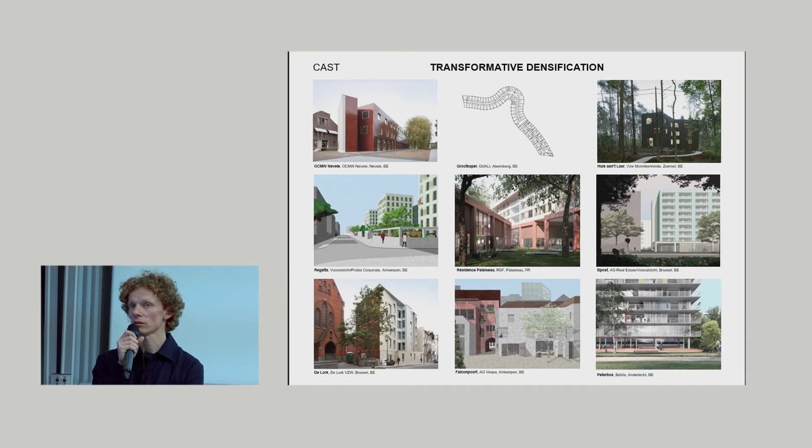Open public structures is another program in the studio, which develops projects for public use.

So we have somehow become, through time, a network organization that is looking out for new alliances with other people, with other organizations, and also creating an expertise platform in which we can answer future challenges that are ahead of us. We bring our people central, and we support them with enough good working environments in order to do the project and transform urban situations.

Recently there has been a publication, a chapter as we call them, which reflects on processes in architecture. This chapter is about design in dialogue, where it researches the role of the architect towards a mediator, an agent, or a curator who sees design rather as a process of dynamic learning, focusing both on output and on ways to work together, in an attempt to exceed the expectations of everyone involved.

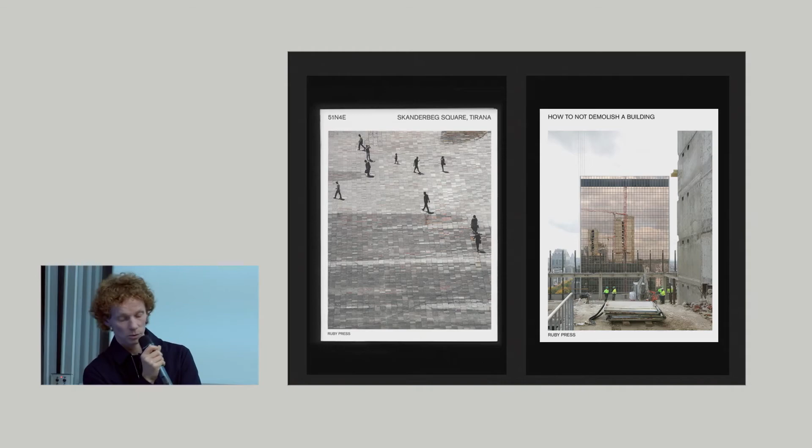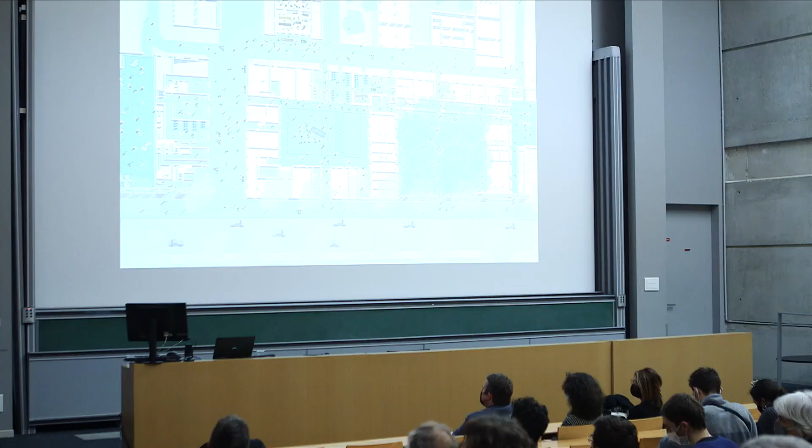It's a huge question indeed, and I think every project in a sense is very typical in its context. What we move out from is that we don't only look at the context, we also look at the relations in between what we do. And indeed, the street might not be the most pleasant one, and somehow it also gives protection to what happens inside. It's just how attractive can you make what is inside so people are actually invited to go there.

And so the invitation and the embracing and giving the quality to an environment which is inside is even maybe more important than looking at what is outside. The way we deal with architecture alongside the main entrance is immensely important. Where do you enter your building? How do you make openings? Is it a large or a small opening? These are things which we do care about and which make the architecture.

But if it is, so it's more a relational answer that we try to give instead of imposing the best idea or the best building for a question that is posed. One way of answering that question.

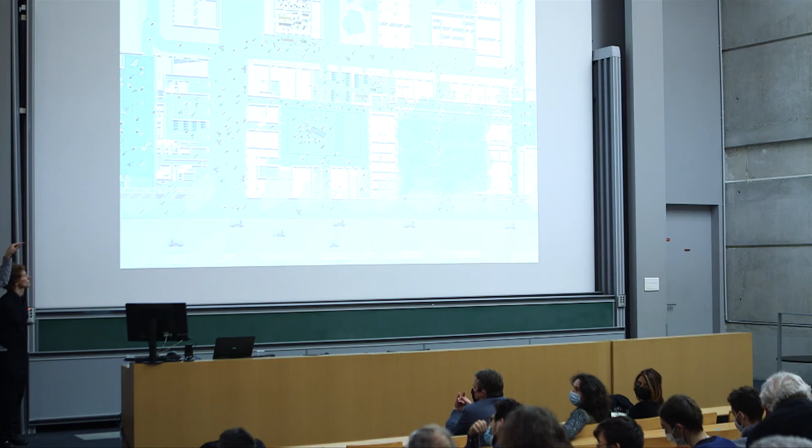Something like that. Yes, and also to actively look beyond the plot line of your project, which is very much needed often, because you can only do as much within your plot to make your building work, but often the answer is also just beyond it, like how do you treat a sidewalk, how do you activate your neighbor. So these questions are often also part of the key to the answer.

And so to answer your second question about space and use, I think what, especially in the Metropolitan Hybrids program that I showed through the 2 towers, you see that we are not in the first step busy with programming the space. We are just making space. The World Trade Center, the idea to make this big volume in the middle of the 2 towers, it was not a specific answer to a specific program.

It was more, how can we make it so that a multitude of programs could possibly happen there? So while conceiving it, it was the idea that also a school could happen there, and due to this height and width, an art gallery could happen there, an industrial kind of shop could be placed there, like a kind of how people could work there actually and make stuff, build stuff. This is the type of spaces we actually envision. So it's linked a lot to old typologies, where you had these qualities, these big spaces, these market halls, these industrial buildings, which today we are so eager to actually reuse for their obvious qualities.